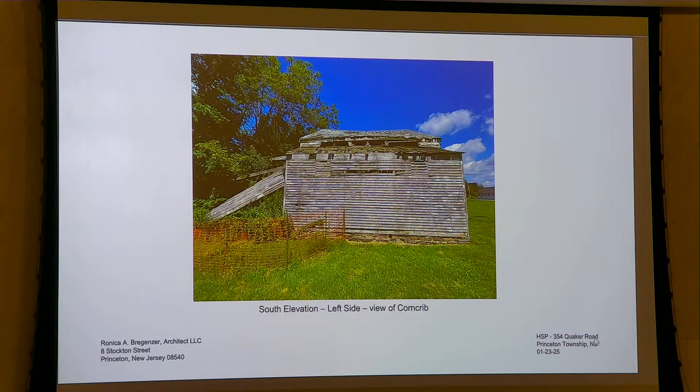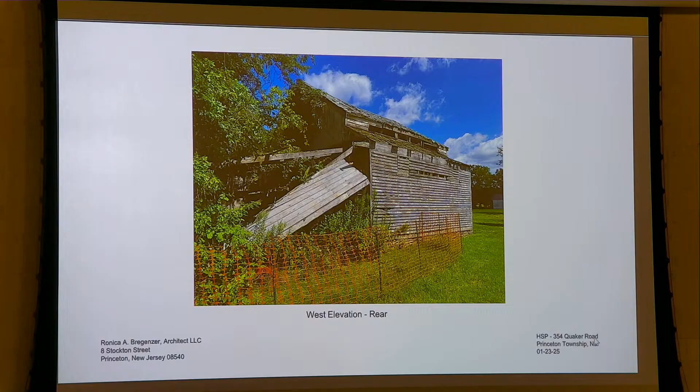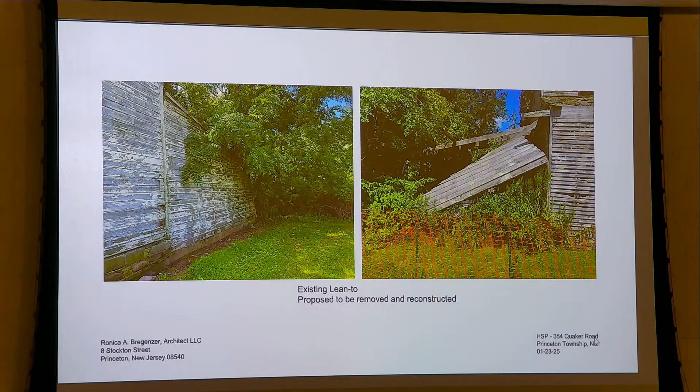Just another closer picture of the shape of the building now. You can see the shingles are failing also on the roof. More close up, you can also see here how the lean-to is twisted in. The barn has also started to twist out, and the foundation has started to move in. So we're having multiple problems here.

And then some context coming from the parking lot, looking at the building. Coming from the main barn, this is the larger corn crib, and then you see the wagon shed in the distance. This is looking from the wagon shed.

What else do you see? You see the other outbuildings - the ones that did receive the diamond shingle roof, the main house, the main barn, and the corn crib again.

Looking at this, there's a raised bed garden behind the barn, and then looking out into the fields, which are owned by the Institute for Advanced Study but are still farmed. This is a view from the street looking at the building, and you can sort of see it back there behind the spruce tree. And then, drawings.

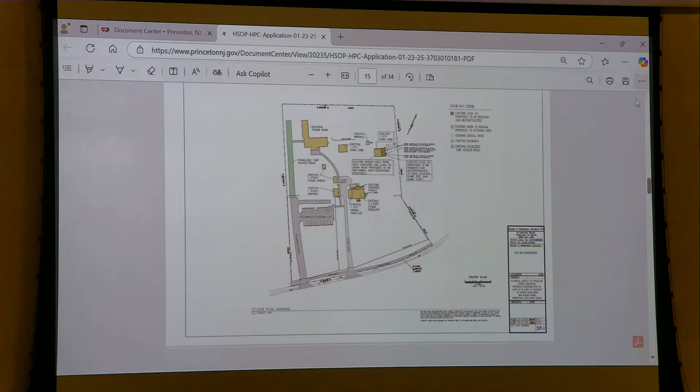So this is a diagram, site plans, just to show the buildings on the property. The buildings are tan, pavement is gray, and the building in the upper right corner with the notes, that's the location of the wagon shed barn, the corn crib.

The dark brown portion is the lean-to, which is proposed to be removed. It's approximately 46 feet away from the property line, so it does comply with zoning as it stands and as it will stand, because we're putting it back exactly in the same spot.

A more detailed view of the barn, I don't know if you can zoom in, the trees that are talked about to be removed are directly behind the wagon shed lean-to. Probably hard to see, but they're back there, and I did meet Taylor out there and we went over that.

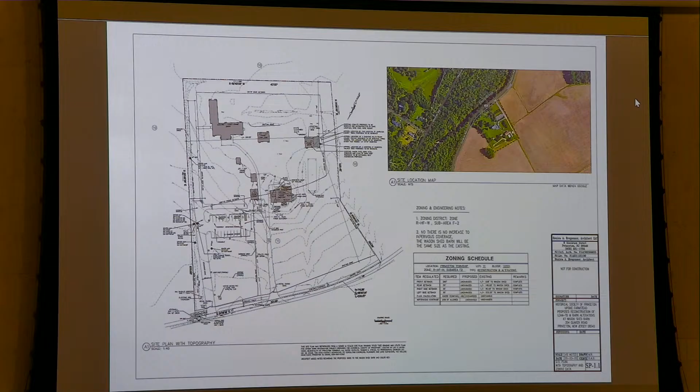The lean-to is block on the top, but if you dig a hole, it's rubble stone underneath, so it's a mixed foundation. There's a lot of repairs to it with cinder block in and out, mortar that's been there, taken away, stones are falling out, and as I said, it's a bit twisted on itself. It's starting to lean pretty badly.

So we're proposing a new foundation with a veneer. We're also removing the roof all the way down to the framing. You might have noticed in the pictures, the building kind of sways. It's beyond the point of being able to repair that, and also to get it to meet code loading.

These are the removal elevations. The things that are dashed in are what we propose to take down.

Is it on? Yeah, it's on. Okay.

Okay, so these are the removal elevations. Again, you can see the foundations, the corn crib, the windows will be removed and replaced exactly as they were. We'll be milling them in wood, same size, same grid, same everything.

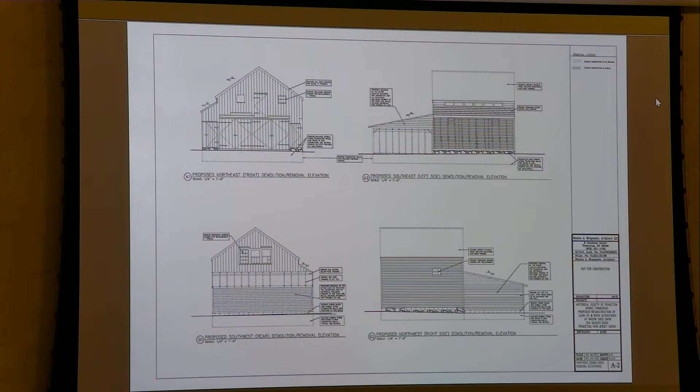Part of the reason for this type of foundation is we don't know what the future of this building is. Right now, the Historical Society believes they will continue its use of just some simple storage. I think they have some shingles in there and a few other things. So initially, it would be simple storage. But in the future, they do have hopes that this building may be something else, and we don't want to limit ourselves to what that could possibly be.

One of the things that was talked about was an interpretive center for a possible trolley car. Long way off, lots of ideas, but again, we want to make a building that has a safe foundation, meets code, and will be here a long time.

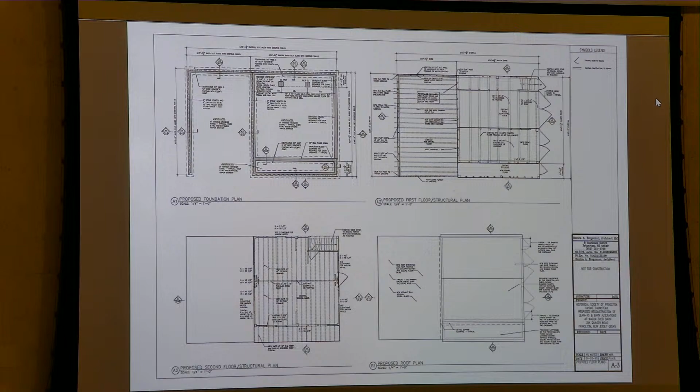Looking at the building again, you can see the new roof with the diamond-shaped shingles. You can see the windows, as we discussed, will be custom made to match exactly what was there. The corn crib, the lean-to, we did measure all the members that are there, putting back the same size pieces except for the roof, which did not meet code.

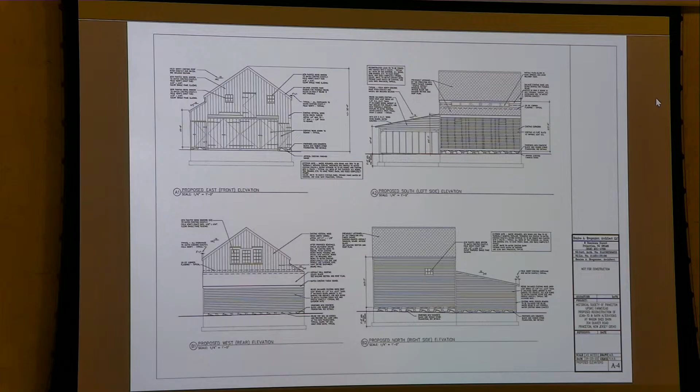So we're using slightly stronger material for the roof rafters. However, the height of this will not change, the size will not change, so we'll be going back basically as it was. The same applies for, go ahead, just put one.

So here's a section through. The new roof framing for the barn will be conventional framing, so it will be a parallam ridge, conventional 2x material for the rafters. Same on the corn crib, that will be conventionally framed roof as well.

And there you can see on the right side details of the foundation showing concrete footing, concrete block, the stone facing. The piece with the X is a plate. The wood plate is basically deteriorated and rotted. That will also be replaced.

Anywhere where we can salvage things, we will. If we can salvage part of the plate, we will. If we can salvage pieces of siding, we will. If we can salvage rubble stone to be used as the veneer, we will. But a lot of the building is in pretty rough shape at this point.

One of the new materials we propose to use is what's called thermally modified poplar, which is this, which I can pass around. It's a material that's been treated through flame. What that does is it takes away all the moisture, and then this will now be a piece of wood that's not going to rot.

The piece in the corner was actually what was there, so you can see we're matching the profile exactly. And the barn is proposed to be painted. The color would be white.

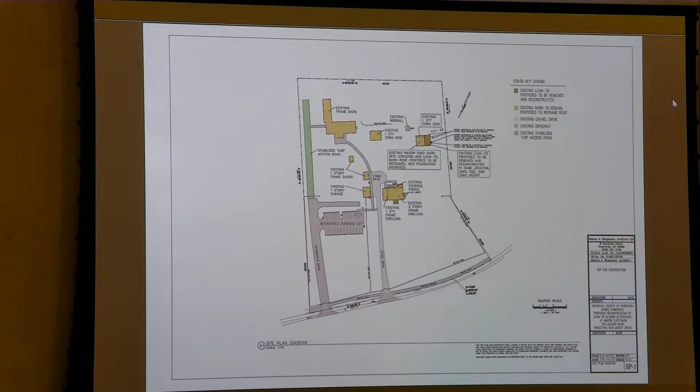I would encourage the notion that you should do some dendro on it. I doubt that it was there the day when—I'd love to think it was there January 3rd, 1777—but I'm doubtful of that. There are plenty of hewn timbers in the building. The spacing of the rafters, as wide as they are, is an early feature.

However, first of all, I have to question preserving that lean-to. I think of all the structures on the farm, it's the least contributing to the history of the farm, even over the full scope of maybe 200 years. The very slight angle of the lean-to roof is such that I think it's certainly not earlier than 20th century, and I'd say it's somewhere fairly deep into the 20th century.

I just don't see the usefulness of preserving it. Money spent sinking into that could be better served preserving some of the original features in this structure. The building is small, 24 by 24, a pretty standard size for a medium-sized farm. The lean-to extends it by another 4 feet, the subsequent lean-to for the existing south side crib.

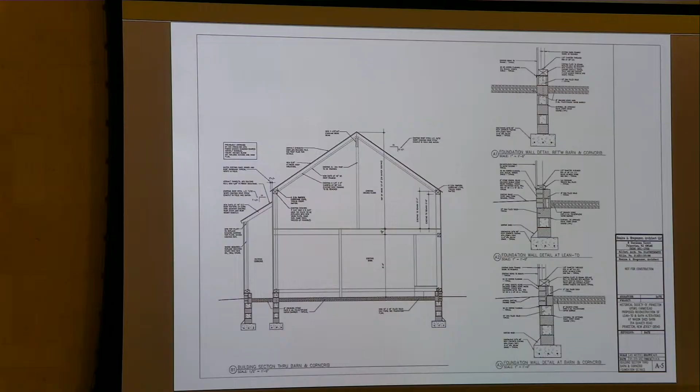The notion of the ridge beam—Alex and I have probably seen, as I said, a couple of thousand barns in New Jersey. I can only think of 3 that had a ridge beam. You'll find that in New England, you don't find it in New Jersey. It's very rare, and it would give a false impression of the interior.

The whole new rafter system, I question that as well. It may be that some of the rafters need to be repaired, and because you're replacing the roof, the opportunity is there to do so. I certainly know where there are a quantity of rafters of those dimensions.

If you wanted to reinforce the roof from any potential splaying in the future, what they would have done in the 18th century would be to have one or more collar ties. If you look, you'll see that the original rafters—the middle set—is almost directly over bent B, and that's where I would suggest, if you wanted to add that, it could be done.

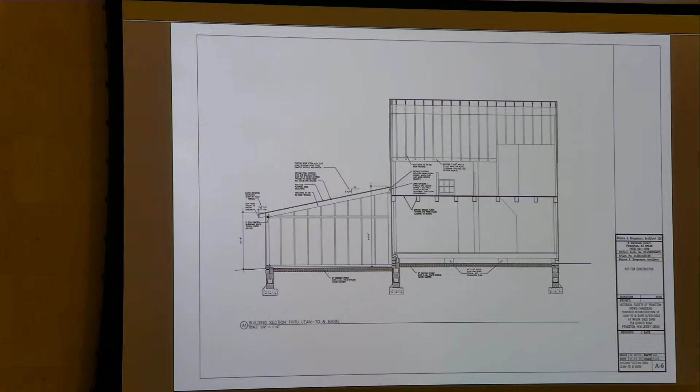There are very few structural engineers that are comfortable with timber framing. We have worked with John Harrison in the past, and I see he's been there. I've been a little disappointed of late in some of his attributions, but in any event, Alex and I would be happy to come out and walk through the building and answer any potential questions.

I would just say the structure itself is too important to me to see the whole roof system, the whole second floor, sacrificed to what may be a false impression of deterioration. I don't see any particular value in this angled roof shingle suggestion. The roof that's there was typical of the 1930s and early 40s. If you were going to put extra money into it, I'd put it into a higher grade wood shingle roof, which would be appropriate for the way it was built and the way it probably survived into the 20th century.

Can I jump in real quick? I don't mean to be negative. I just care for the building, and I'm sure that you wouldn't have spent as much time and effort as you have if you didn't feel like the building was significant. I just feel like it bears more scrutiny. Thank you for your time.

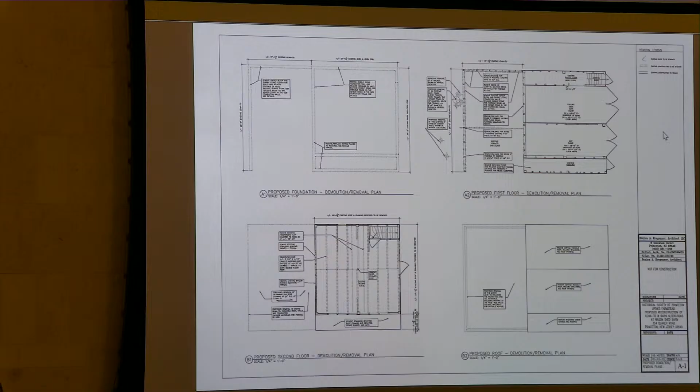Okay, so what if we accepted their proposal with the condition that no lean-to would be built and that a consultation would happen before the roof is constructed? That's acceptable, do you think?

And maybe, because the lean-to was not going to be rebuilt, and there's a lot of rubble underneath, maybe that'll be extra to be used for the foundation for the barn. Yes, agreed, that's fine, right, because we don't have an issue removing that lean-to portion from the project itself.

Just one clarification, that we don't have a problem sitting down and consulting on the roof aspect, but just wanted to confirm it wouldn't be something subject to further review. This means what we're submitting otherwise is what we intend to actually proceed with. Right, so we would not be returning to the full commission—any changes would be done administratively.

But there would be a general approval, but if there are changes, we could do it administratively. Does that sound okay?

I'm confused, what changes? The only thing would be if, after the site meeting, you came up with a better idea than what's proposed, then that could be an easy alternative change if you wanted to. Okay.

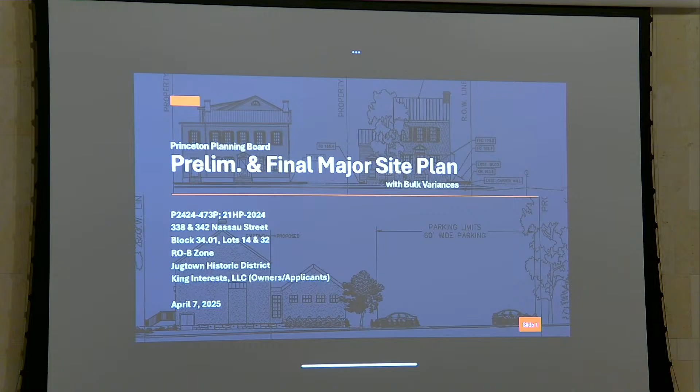Thank you, Elizabeth. And thank you, Board, for hearing us again. Ryan Kennedy from Stevens and Lee for the applicant.

To my left, your right, we've got our 2 witnesses for this evening: our architect from Posen Architecture, Tom, and our planner engineer, Jim, from Kensho Resources. Maybe we could swear them both in, probably round robin as we go through this.

That'd be great. Okay, both just raise your right hand. Do you swear that the testimony you're about to give this evening is the whole truth to the best of your knowledge? I do. I do. Thank you. They were both, I guess, accepted as experts last time, so I don't know if it's necessary to go into any more detail there, but thank you.

So first off, when we were here last, we got a lot of comments and ultimately went back to the drawing board. The planning board, Madam Chair, you could probably do this better than I since you were there, but ultimately took the opportunity, since we had been scheduled with the planning board, to get feedback on your comments and a drawing that we had done as an interim progress towards what we think we were hearing from HPC. We're back here to take you through it, hopefully to see that we're close as we get towards the end. We'll note that we do have to finish engineering before we can go back to planning.

So there will be revised submissions. Perhaps we can discuss how close we are on the details, whether it's on our end here, if there's a subcommittee that's appropriate, or if it's some small level of detail or a big level of detail - we can talk about what your expectations are. But our hope would be that we've gotten close enough that we're in the right ballpark to finish the engineering part of things.

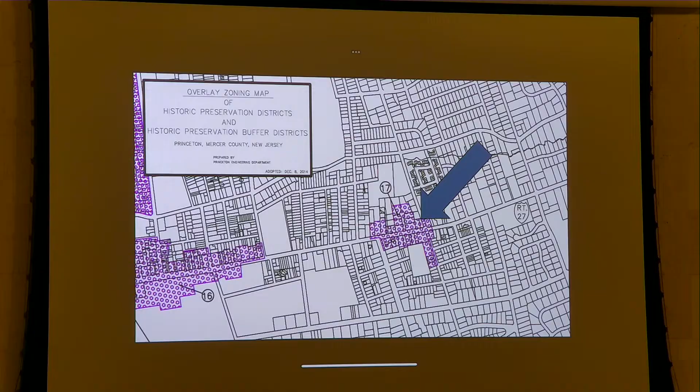Again, here's the historic map. That arrow points to the two properties there in the Jugtown district. Yeah, in that overlay, historic overlay.

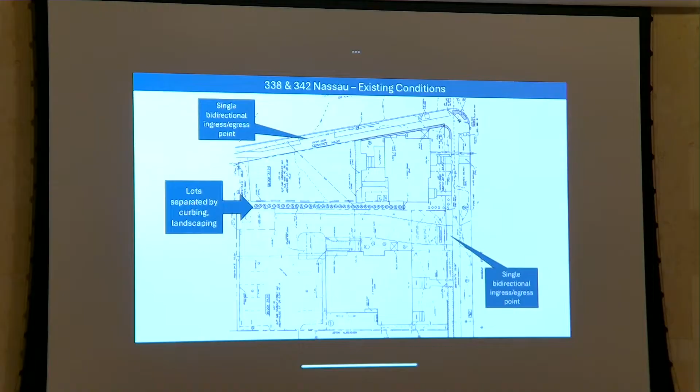So then this diagram might show that as well. This is the existing conditions at the site? Yes, two-way entrance up off Harrison as well as on Nassau Street, and then that separation currently of the properties with the hornbeam hedge and some curbing on 338.

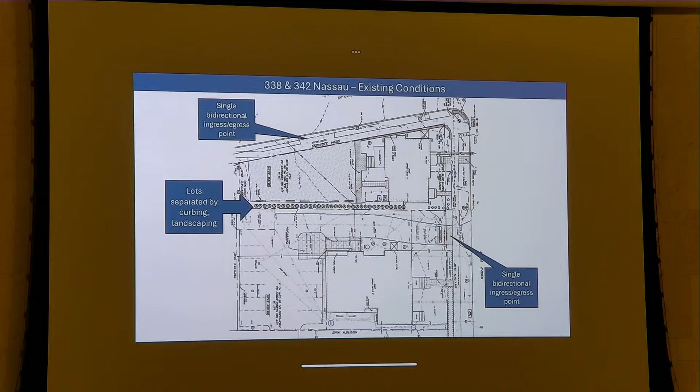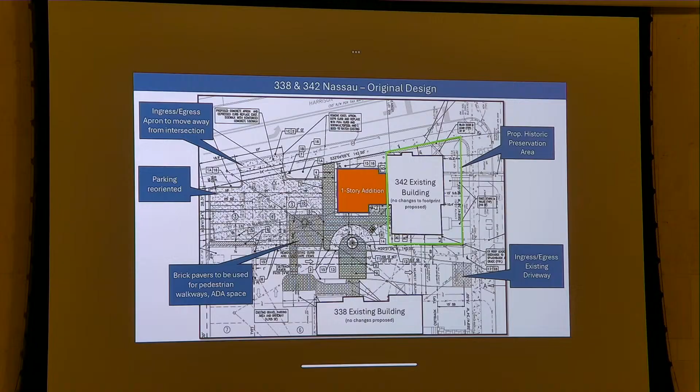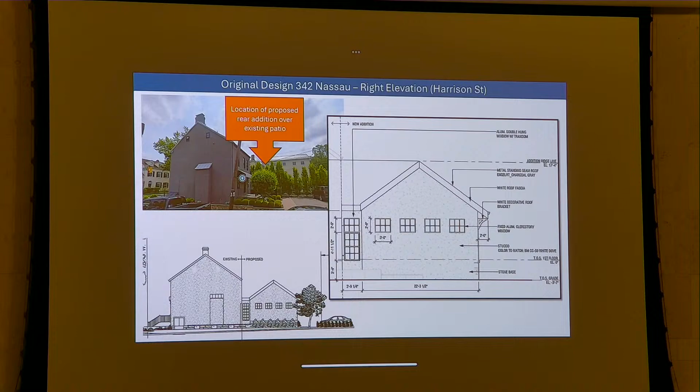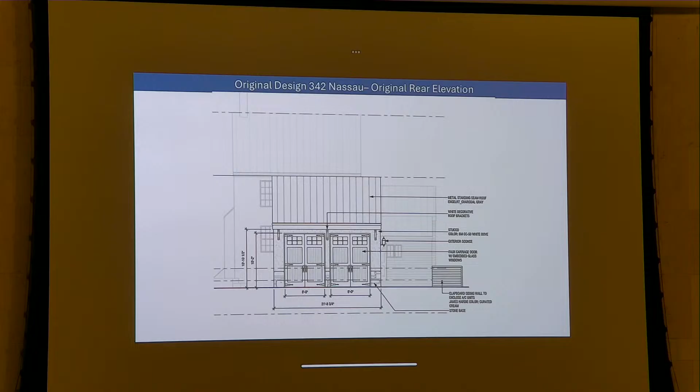Good point, we won't want to burn it into anyone's retinas, unfortunately. But again, this is the rear, prior and now abandoned, rear elevation, and then the internal elevation if you were looking from that plaza area.

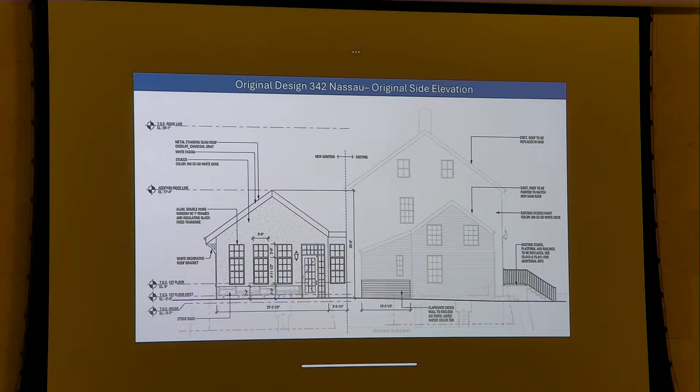Is it correct that the primary way to actually get into the basement now is through some Bilco doors? There's been some problems with using it that way? That's right. There's been some vandalism on those doors, and plus when you open those doors, it's pretty treacherous to get down to the basement.

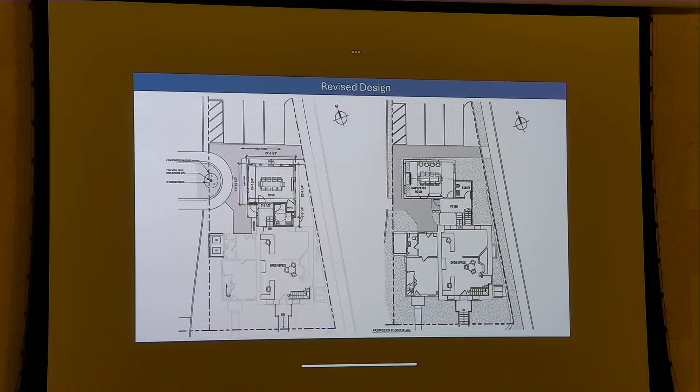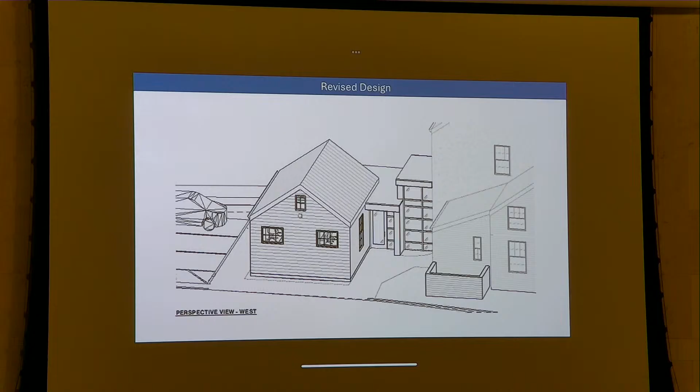Next, this is the other side from Harrison. You can see in this view that the new addition has been pushed over quite a bit. The majority of the north facade of the existing historic structure is now visible because the ridge line is much lower. You can see the connecting link, which is more glazed with some raised panels where there isn't any glazing, meant to be a light connection between the existing building and the new conference room.

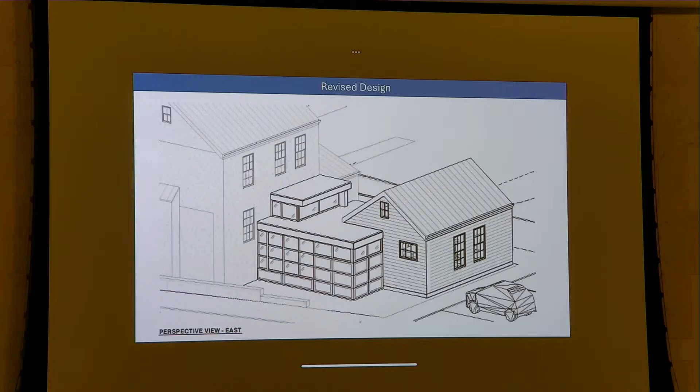The ridge line of the new piece has come down significantly, to the tune of 6 or 7 feet, so now it's at about the height of the sill of the second floor windows. Again, it's much more diminutive in structure, much more reduced in scale.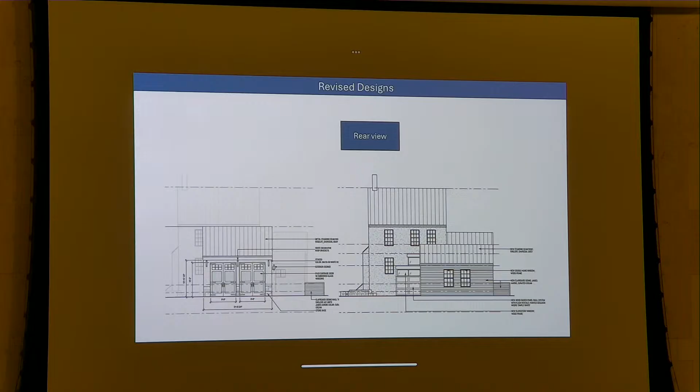You can also see from the side-by-side comparison here, looking at the older version of the conference room and the newer version to the right, that the scale has been reduced significantly. So the existing house really does take precedence and really stands out.

One other thing to note, on the far right here, you can see the existing front porch. The plan, following the HPC's comments, is essentially to repair that in kind.

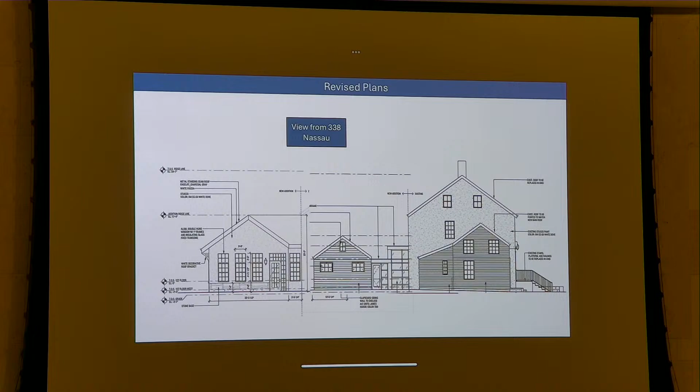That's correct, yes. Could you repeat that? The plan for the front porch is to repair it in kind. Good. Would you mind repeating that?

No, all kidding aside, our goal here is that we hope we've heard you guys and the planning board, and to the extent we missed something, please let us know. Our hope is that we've heard your comments and are incorporating them into the revised plan.

Next, this last one is again the side view from the street, but with some context of the additional setbacks overlaid as well, so you can see the diminished size from the elevations, but also the setbacks, which you really need to see from the top-down view.

Now, here we've got a before, original, and revised version of the site plan. Could you take the commission through some of the major changes from a site perspective? Sure.

As we mentioned before, we increased those setbacks greater than previous for the addition, as we're pointing to on the right-hand side of this slide, as well as adjusted the width of the parking stalls, reducing them slightly so that we could increase distance to the right-of-way line, and to the hornbeam hedge trees that are adjacent to the generator building.

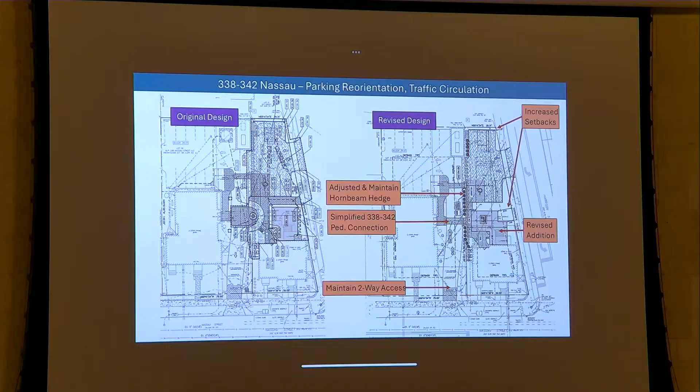So those are the highlights of the changes. We hope we've caught what the board was looking for. There is, as Ms. Kim said, if this is the right direction, we are quite close, but perhaps there's further discussion needed on some of the final details on the materials—I don't know if something is appropriate for a subcommittee. If the planning board agrees that the variances in the project are appropriate, we hope they would, but it's not a given that this would even make it that far. But ultimately, we're hopeful that the direction we're taking is indicative of the direction we got here from the board. So with that, thank you.

Well, we really appreciate you listening to us, and there are quite a few changes here I see are very positive. But I would like to open it up to board members.

First, I just have one quick question. So in the historic building, there won't need to be any kind of increase in like cutting through the envelope, right? I mean, so the entrance and exit will be from that back doorway as it is?

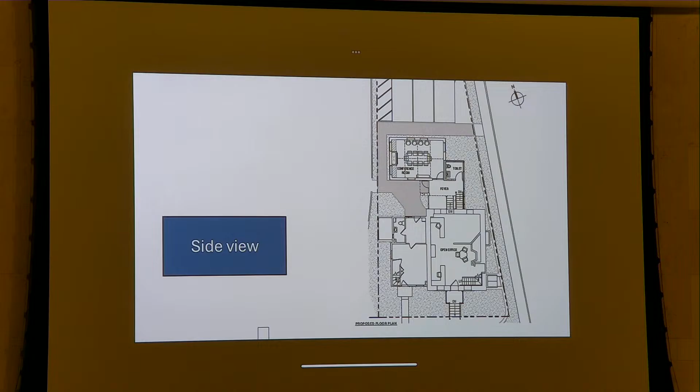Okay, anything else? Charlotte? I wasn't at this first meeting. Oh, could you talk into the mic? I'm playing catch-up a little bit since I wasn't at the first meeting, so if you could come back.

Sure. All right, Roger, did you see this? The first one? Yeah, yeah.

I like the distinction with the glassed-in conference room to distinguish it from the original historic building. But will it be tonally tied into the building in terms of the coloration of the glass? I didn't catch those details. Do you mean the link structure that connects the two? Yeah, would the glass color match what exists? It's probably clear glass - we would use clear glass, probably with a low E coating for energy efficiency, but it would look the same as the existing glass utilized.

And the framing? It's all wood, it's not going to be aluminum, it's going to be wood framing. And the panels below the conference room windows are actually a raised wood panel that would be painted. It's hard to see in the drawing, but it would be a raised detail panel.

Keep in mind, everything is not going to be the gray that we see now, the charcoal color. It's all going to be a light cream with dark green trim, kind of similar to the other buildings on the corner. So I have a question - is that gray going away from that building? Yes, it's going to be a light color, they repaint the whole thing. Hallelujah! Oh, good, oh my God.

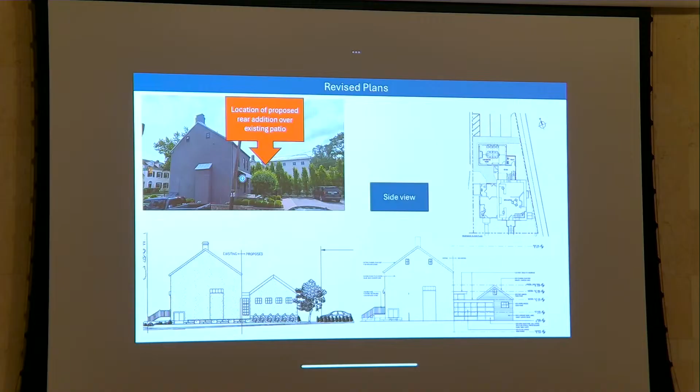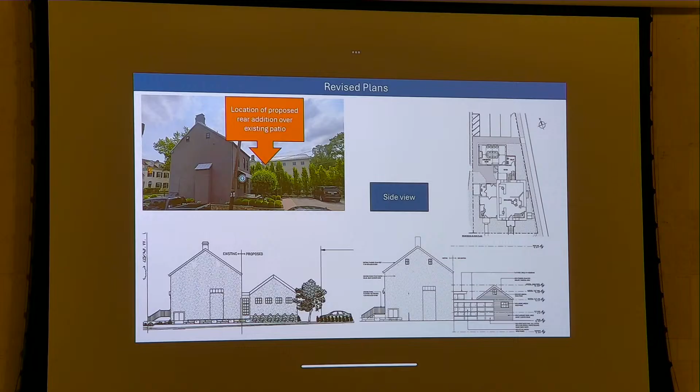The other thing is, I'm just thinking the hyphen is getting kind of large, and I'm wondering about the connection to that with the new conference room - from the view from the street it's a little bit awkward. I'm wondering if that bathroom, are you able to perhaps flip it and put it next to where the staircase is, so you could have a connection that meets at that corner? There wasn't consideration enough - we looked at several options, there just wasn't enough space there to get a barrier-free toilet room.

So that's why it is where it is right now. Plus, we were trying to get the toilet room door a little bit out of the way, so you're not looking right into the toilet when you enter the building. Understood, okay, that's it, thank you.

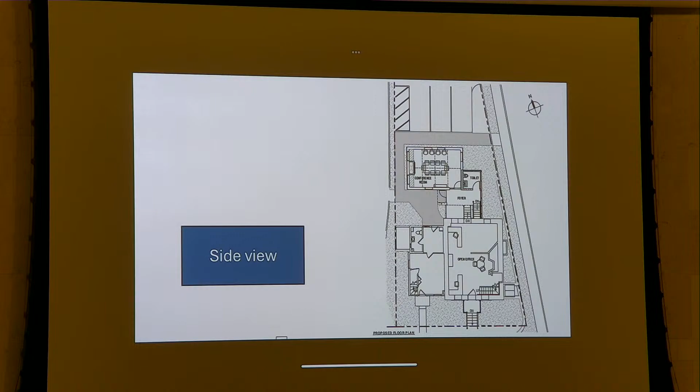All right, thank you. If there are no other comments, I want to open it up to the public. So come on up, Clifford.

Thank you, Julie. Should I swear in? If you would raise your right hand. Do you swear that the testimony you're about to give is the whole truth to the best of your knowledge? I do. Thank you. Please state your name for the record. Clifford Zink, Z-I-N-K, on Aiken Avenue in Jugtown.

Several board members have congratulated the applicant, and I agree. I'd like to reinforce that the applicant has made significant changes, which result in a much improved project. I don't need to go through them all because they've already been discussed. Preserving the rear stone wall is particularly significant in avoiding that very wide opening that's been discussed.

When you do cut the cellar door opening through there, that stone wall is probably 18 inches thick, and it's rubble stone, probably from the quarry down the street, almost certainly. So it's going to be a very delicate operation to cut that through carefully and not cause any damage.